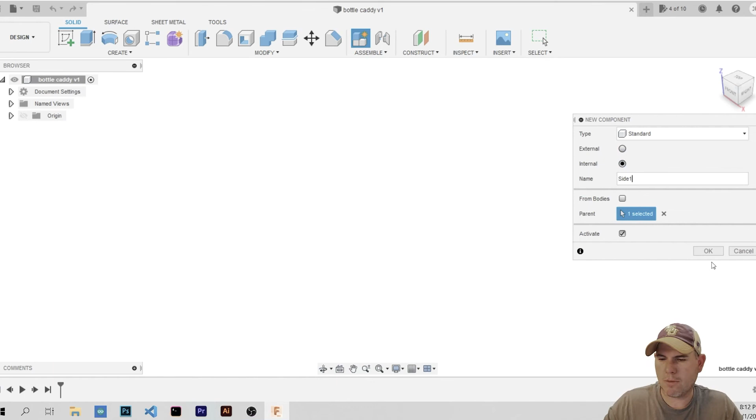So next thing that we want to do now that we have it saved is we want to go ahead and create a component. We want to work from components because it'll help us keep it organized, and it'll actually help us later on if we want to try to move it into a drawing and create a drawing or something like that from it. So we're going to start out working with one of the sides. I'm going to call this component side 1. If you go ahead and name them from the beginning, it'll help keep you a little bit more organized also. I wasn't very good at this when I first started with Fusion, so I'm trying to get better with it.

All right, so this bottle caddy, I want it to kind of resemble an actual beer bottle. So I'm going to bring in some reference material to help us a little bit. To do that, I'm going to come over here to Insert, Canvas, and I have a picture over here of, there it is, a beer bottle. We're going to open that up, and I'm going to select the face. I don't have a face yet, so I'm going to select this plane right here. And for now, I'm just going to go ahead and hit OK. So I don't want to move it or anything just yet. We'll kind of position it in a minute.

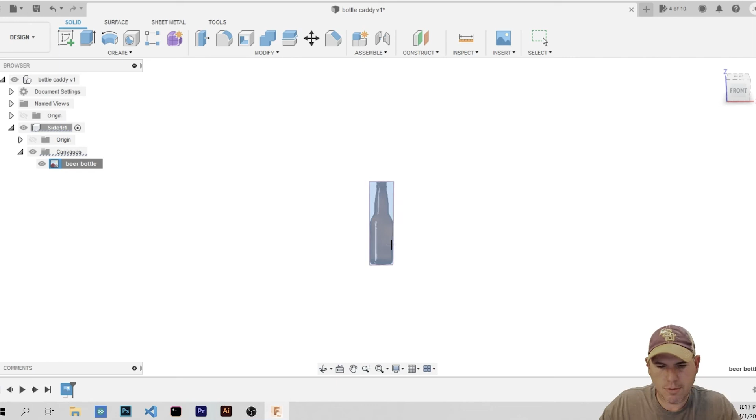The first thing I do want to do is I want to go ahead and calibrate it. So right now I have no idea what size this picture is, but we can change that. So I'm going to come over here to beer bottle, right click, hit calibrate. And then what I can do, I can use my scroll wheel and zoom in just a little bit. I'm going to catch this edge here and then click once over here, and it gives me a dimension box. So, and now I can type in, because I know I want the width of this side to be about 5.5 inches. So I'm going to type in 5.5 and hit enter. You can see it blew up real big, so we'll scroll out now.

So the actual width of this canvas, or this picture that we're using for reference, is right at 5.5 inches now. So now we can really get started.

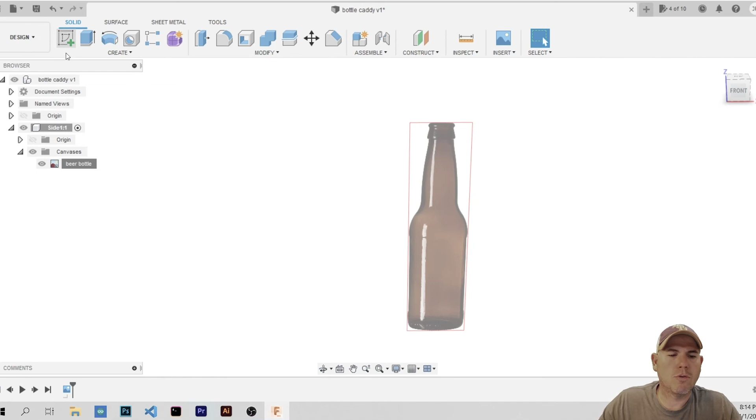To start generating 3D models in Fusion, we first have to start with a sketch. We're going to come up here to Sketch, and to create a sketch in Fusion, you have to create it on either a face or a plane. Since we don't have any faces created yet, I'm going to select one of these planes from the origin, which is going to be the same one I initially inserted my canvas in.

All right, so now that we have a sketch created, we're in our edit mode for our sketch. I want to draw a rectangle, so I can come up here and select a rectangle, or I can hit R on my keyboard, which is a shortcut for rectangle. So click once and just start dragging out.

As long as I don't click again yet, I can go ahead and edit the dimensions of this box. If I click out, I can still edit it, and I'll show you how to do that in a second. But I'm going to show you how to do it like this right now. My width right now, I can type 5.5 because that's how wide I want it to be. Do not hit enter, instead hit tab. That'll move you over to your next dimension, which will be your height. I want that to be 11 inches. So now I have a box that is 5.5 inches wide by 11 inches tall.

But you see how it's blue around here? That means this box is not completely constrained yet. I can actually pick this box and move it up wherever I want to. But I want to be able to fix it to where it will not move right now.

So to do that, I'm going to use some of these constraints. I actually want to use this midpoint. Let me hit escape to go back to my selection tool first, because I still had this edge selected and I don't want that for this. Now that it's deselected, I'm going to click midpoint. I want to select this one down here, and then pick that origin right there. So you see, once I clicked it, the box turned black because the width and height have constrained dimensions, and it's fixed to this point right here now.

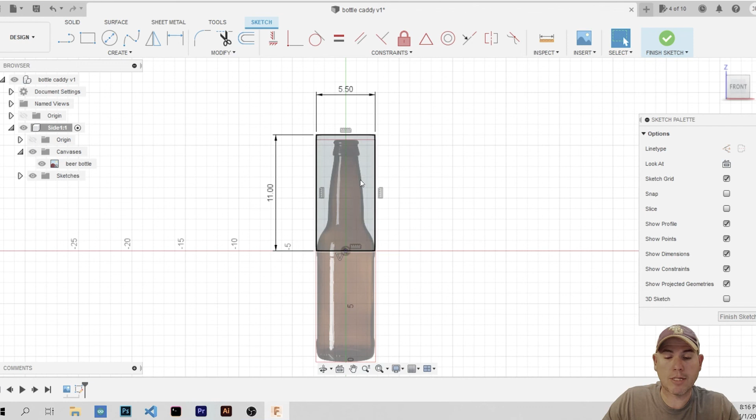Let me back up just a little bit. Now that I have that fixed and constrained, we can move our canvas around to line it up where I want it to be.

So I'm going to select this beer bottle, right click it, and instead of calibrate this time, we're going to edit canvas. Now I can move this thing around. I can move it here, or click on that one and move it left and right. But it looks pretty good left and right.

So I'm just going to move it up a little bit, and scroll in some just to where it's... there we go, right about there is good. I like that. So now I can come over here to this edit canvas panel and just click OK, and that'll get us out of that.

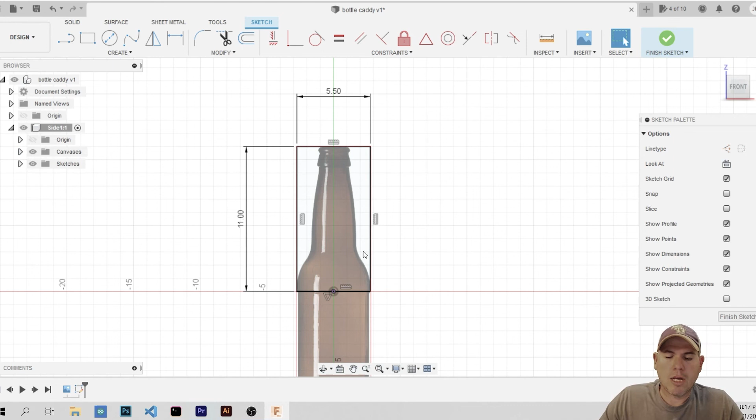So now I know that the height to the divider that I want is going to be 4.5 inches from the bottom. So I want to come over here to this line tool. I could click on the line tool, or just click L on my keyboard. Now I can snap to this edge here, and I can drag this out, and move it up and down.

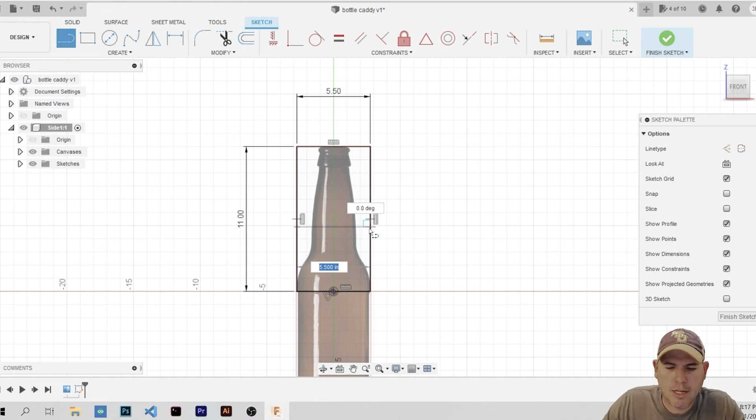If you see the little blue box right there, that tells me it's 90 degrees right there, and I can get it to go ahead and snap to 90 degrees. If I don't snap it to 90 degrees, you see this little icon right here, that's the same as this perpendicular icon here, which is the perpendicular constraint.

So if you didn't quite get it right, we'll hit Control Z to back out of that. I'll show you what you can do if you don't quite get it to 90 degrees. So that's a little exaggerated, but I'm going to come up and pick up that perpendicular constraint. I'm going to click that line, and it makes this line perpendicular to this one. So if it didn't quite snap where you wanted it to, that's how you can constrain that one. So that one's good there.

So now we want to dimension it. To set a dimension, I know I want 4.5 inches from here to here. So we're going to hit D on the keyboard, which is your dimension tool. Now that I'm in the dimension tool, you see the icons changed next to the cursor. I click there, click that line, and drag it out and click, and now I can set this dimension. I want to type in 4.5. So now we're at 4.5 inches there.

The joinery I want on this is going to be a couple rabbet joints, for the divider up top and for the bottom plate at the bottom. So I'm going to go ahead and draw those in, again using a line. I'm just going to draw another line under there for this rabbet here. And then I'm actually going to pick up my rectangle tool for this one, click and get it to snap there, and drag out to this next line here. So now I have where my two rabbets are going to be drawn.

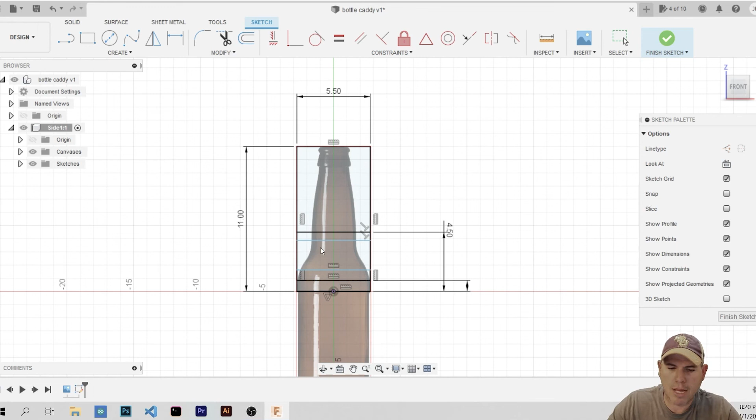So instead of me having to try to do math, because I want this rabbet half the thickness of the material, I can do this right here. I can do 0.482 divided by 2, and I can make Fusion do the math for me. Check that out. So now that's going to be half the thickness.

Now I'm going to dimension this one here. Same thing, but here's another little trick. Instead of having to type that all the way out again, since you've already figured it out once, with this box highlighted and this dimension highlighted still, I can just come and click on that dimension right there that we already figured. And you see how it changed right here. Hit enter, and now this dimension is going to be the same as this one.

We're going to do the same thing up here, and then I'm just going to click down here and hit enter. So that tells me these dimensions here are the same as this one. If I wanted to edit this, I could come in here and put 0.5, and it's going to change all of them to 0.5. But I'm just going to hit Control Z to undo that. So now I like the way those slots for my rabbets are drawn.

Now let's actually tackle this profile I was talking about that we want to do with this bottle. I'm not going to follow it all the way down here. What I'm going to do is kind of draw the neck and the mouth of the bottle, and then just have it widen out till it gets to this point right here. That's kind of the look I'm going for, just to resemble the bottle.

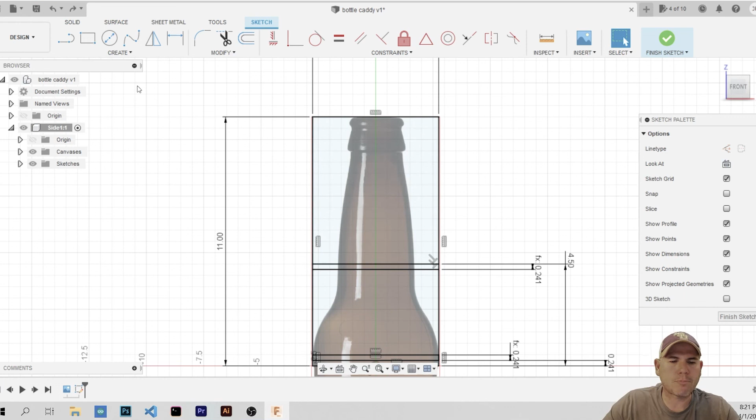To do that, I'm going to jump over here to this tool, which is our spline tool. I'm going to click on the spline tool, and if you're familiar with the pen tool in Adobe Illustrator or Photoshop, or any other CAD design Bezier curve type tool, this is going to be relatively similar. What I want to do is get it to snap to this top, about where this curve starts here.

I'm going to find the middle of the curve and start dropping nodes here about where I want them, about where all these curves are. Since we're going to come down here, I'm not going to come straight down because I have this inside curve up here. I'll click off up here somewhere and get it to snap to this intersection. All right, that's all I want there.

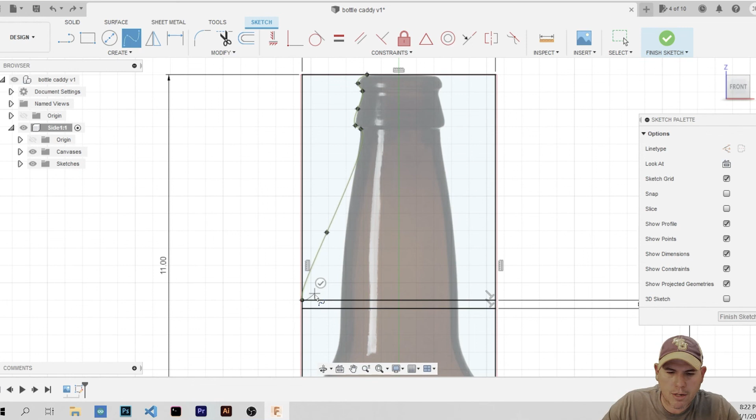Now I can either hit escape on my keyboard and go back to my selection tool, or I can hit this little green check mark here and it'll pull me out of that. I'm still in my spline tool since I clicked the check box, but I'm actually done with it, so I'll go ahead and hit escape.

Now that I've got my selection tool, I can start pulling these handles. You see it's got these little handles here, I can pull those out, drag them, and adjust them. I'm just scrolling in and out. If you lose your handles, just click on the line and it'll bring them back. So I'm adjusting those and tweaking them until I get something I like.

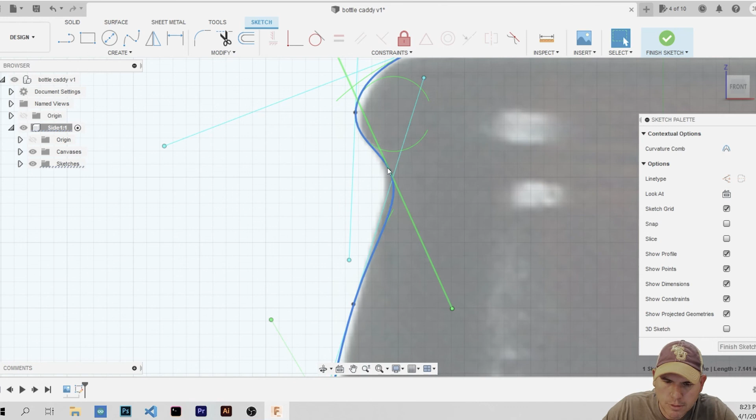Just similarly following the bottle. I'm not trying to get it exact, but I want something that fairly resembles this bottle. I'm trying to get this one here. There you go, buddy, we're starting to look pretty good.

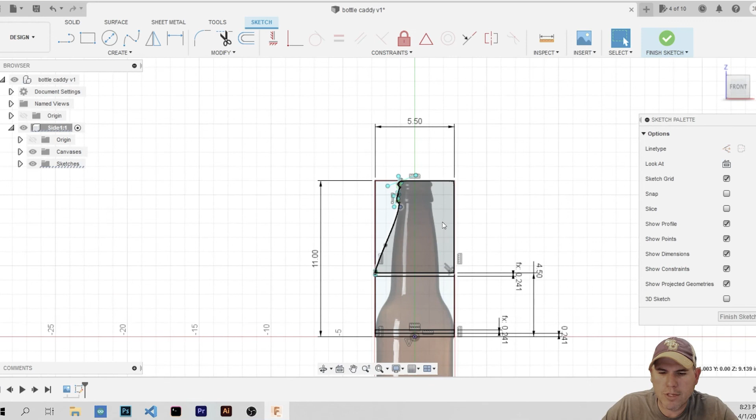See, if I click next to a particular node, that's the node it's going to give me the handles for that I need. Another thing, if I press down on my scroll wheel, it'll give me a hand tool where I can pick it up and drag it to reposition so I can see it. If you don't have a mouse with a scroll wheel, I really recommend you get one.

All right, so I can drag these handles in. This one's being kind of ornery. All right, there we go. Let's see, this one here - oh, that ain't what I want. I can actually click on the nodes also and drag them around some. Whoa, too much - there we go. That's it, let's drag this one in just a little bit.

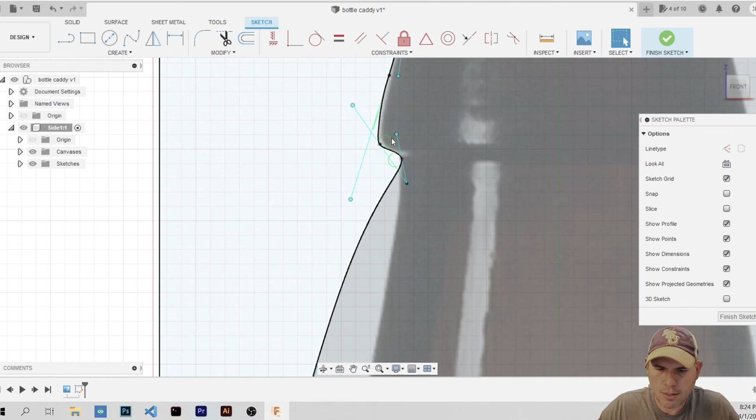Why did you connect to that one? That didn't do what I wanted it to do. We're going to hit Control Z and go back to where it wasn't connected. So guys, I'm going to leave all my little screw ups in here, just so y'all know I do make them myself. I ain't perfect at this, I'm just trying to learn also.

All right, we're not going to get too crazy with it, but that kind of resembles the profile of a bottle, so we're going to leave that there. Now I can click off of that. So now, instead of having to redraw this again, I'm going to just mirror this across. To do that, I could make sure this origin is on and use the Z-axis on this origin.

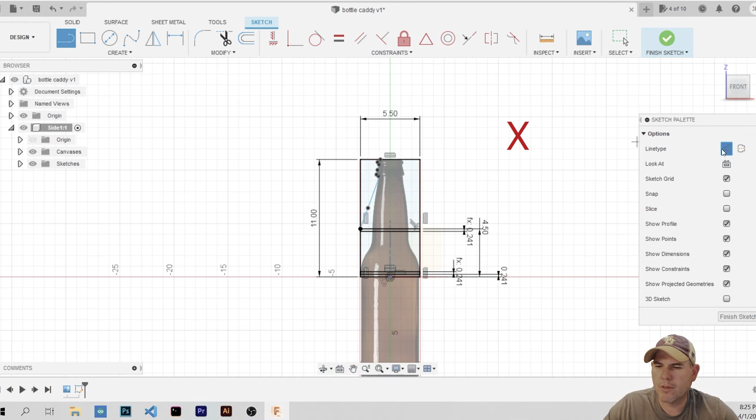But I'm going to go ahead and draw a construction line because I'm going to need it later on. I'll hit L for the line tool, then come over here under my sketch palette to the line type option, this one right here. If I click on that, it'll give me a construction line. I can also toggle that by hitting X on the keyboard, so we'll turn that on. I'm going to get it to snap to the midpoint and draw a little construction line there. I'll hit X to get out of that.

I'm going to go back to my selection tool, click Create, and down here it says Mirror. I'll select that line as my object, and my mirror line is going to be that construction line we just drew. You see, it just mirrored that across.

All right, we're done with that. We can click OK. So now we need to draw our pocket that's going to be for our handle.

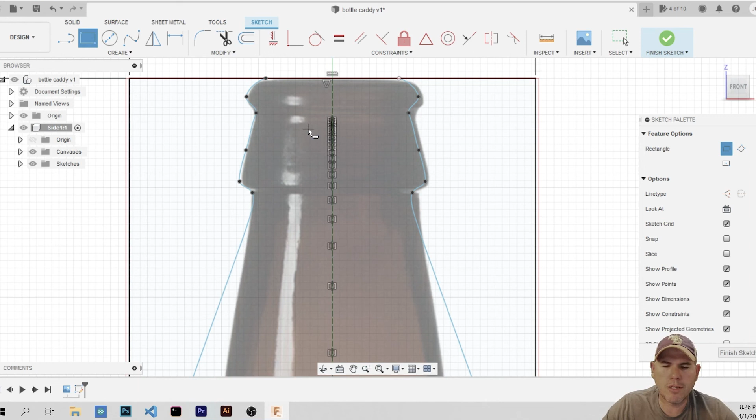Again, we're going to use the same thickness material, so I'm going to draw it out. I know I want it to be 0.241 wide. Tab, I want it to be 0.75, so 3/4 of an inch tall. I'm going to hit Enter.

So again, you see the blue line. The dimensions are good, but it's not constrained. So I want it to be centered on this center line, which is why we drew it. I'm going to click Symmetry, select this side, then this side, and lastly select that center line. As soon as I do, it's going to center it and put those two lines symmetric to that center line. So those have turned black.

I still need to constrain it more. So we're going to go to the Dimension tool, select that line, this line. We're going to drag that out. We're going to call that 0.75.

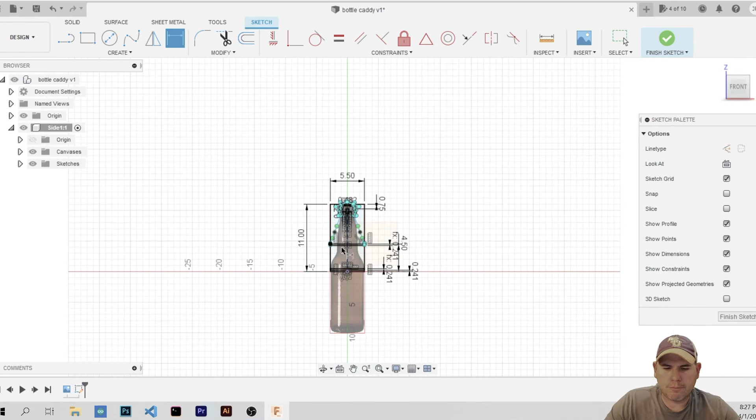All right, so now one last thing on this sketch that I need. I'm going to put a little magnet on the inside of this for either a cap catch or maybe for a little surprise later on down the road. I'm going to go ahead and draw it for the magnet I got right now, which I believe my size is going to be

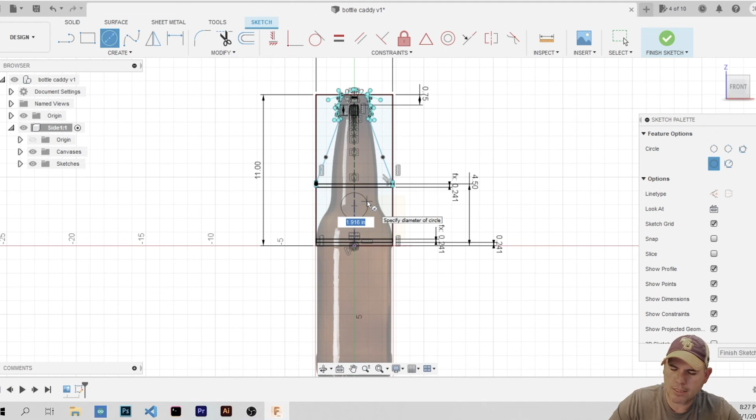0.82. Click Enter and dimension again. Select the center of that point there. I'm going to pull it out here. It's getting kind of messy over there. And I want that about 3 inches, so I'm going to hit 3. Enter. All right, cool. That's pretty much all we need for this particular sketch.

So we can come over here and clean this up a little bit. Let's turn that canvas off. We can click Finish Sketch. And now that we have our 2D sketch, we can go ahead and start extruding this into 3D space.

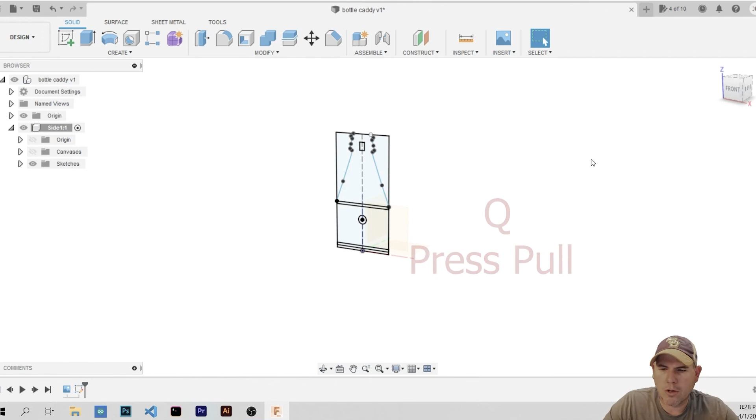So to do this, we're going to use our Extrude or Press Pull tool. I'm going to hit Q on my keyboard for Press Pull. Also, you could hit E, which brings up the Extrude tool, which does work relatively different. I say relatively, they work pretty close to the same, but you are going to have instances when you get more complicated models that they are going to work a little bit different. When we get to some of those situations, I'll show you those. But we're going to be fine here with just the Q tool for Press Pull.

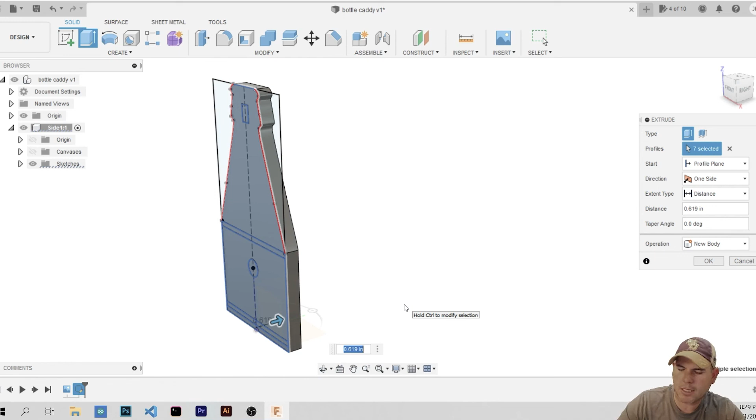And I'm going to go ahead and select everything on this side right now. So now you see we have this little arrow. We can grab that little arrow and start pulling it out. We get another dimension box. And again, my stock is 0.482, so I'm going to extrude it out to that dimension.

All right, so now we have just a solid side here. If I turn this sketch off for just a second, you can see that all it is just a solid profile on the side. So let's turn that sketch back on, and let's go ahead and do the cutouts for our rabbets, our magnet hole, and our handle hole.

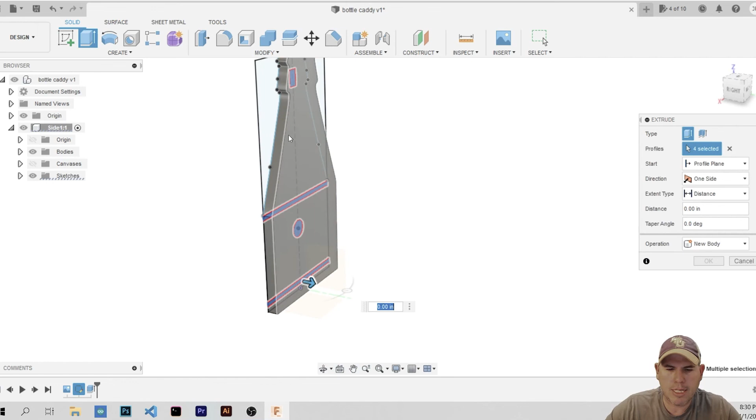So again, I'm going to hit Q for Press Pull again. We're going to click that sketch geometry for the rabbet slot and the magnet, and then for this magnet for our rabbet slot there. So I really want the inside to be this side here, but my sketch is on the opposite side.

So to get it to extrude from there, I can come over here to the extrude panel, and from the start right here, instead of profile plane, which is the plane that the sketch is on, I can come down here and do from object, which is where it's going to start. So it's telling me to select. I'm going to select this other face right here. So now I'm starting from that face.

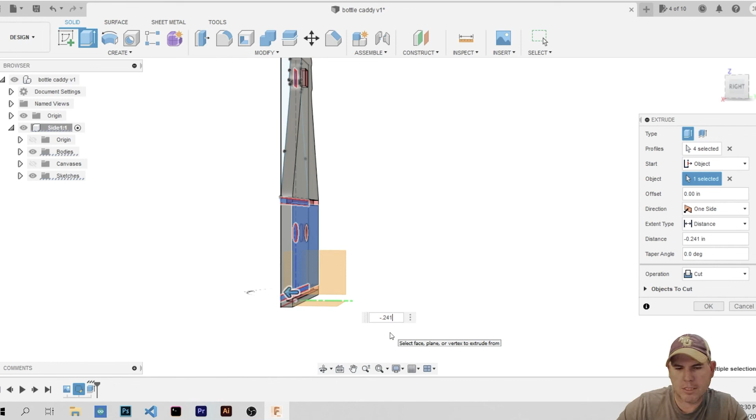So instead of pulling out this way, I'm going to come in this way. And as you see the red, that means I'm starting to cut. So now, again, I'm going to do minus 0.241, which is half the distance, actually half the thickness of my stock.

So now if we turn the sketch off, you see we have some nice little slots for rabbets for our divider and for our bottom. We have a hole here for our handle and a little hole here for our magnet.

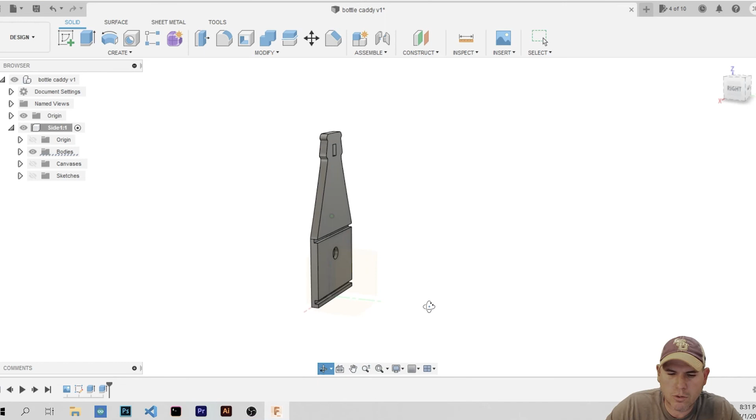Now that we have one side drawn, just like the sketch geometry, we don't need to recreate this particular side again. We can just mirror this across, just like we did the sketch. But to do that, we need something to mirror it around, so we're going to use a construction plane.

I'm going to click that and make a construction plane that's halfway in between this inside face of this side and the side we're going to create. I'll click on that to tell it that's where I want it to start from, and pull this out 4.5 inches because I know I want the divider and the bottom to be 9 inches in between the two sides.

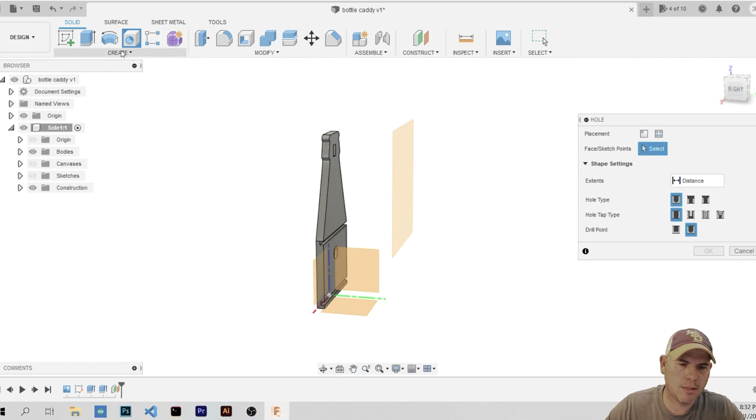So now that we've got that, I'm going to click create, not the hole tool, create. And again, same thing, mirror down here. So in our mirror panel, instead of mirroring faces, we want to actually mirror the entire component, because this will create us a whole separate component for the other side.

I'm going to click component, select this side here — this is a component — and the mirror plane is going to be this plane. Now we can just click OK.

So now we actually have two separate sides. If you see, it showed up down here. I can click it once, and click and hold, and it'll let me change the name. So I'm going to call this one side 2.

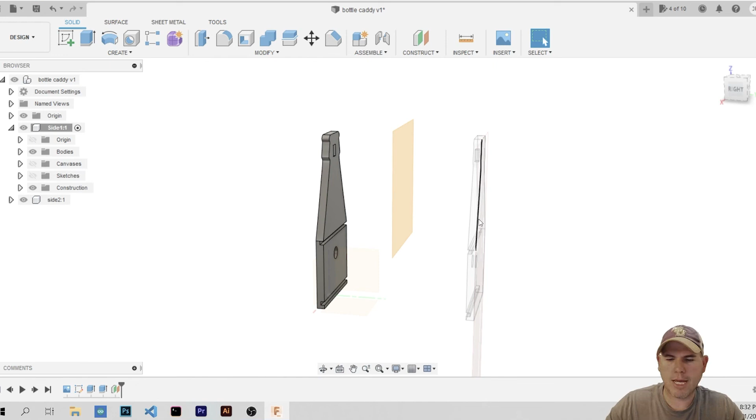Now that we have two separate components, you see how it's kind of a wireframe here? That's because our active component is still the first one we started with. If we come down here and click on side 2, you see how this little radio button jumps up here. We can click on that, toggle it on, and now it'll give us the other one.

So if you see, that component copied everything, and even our canvas is turned on for this other component. So let's clean it up — let's turn that off, and let's turn this construction plane off for right now because we don't need it.

Let's go back to side 1. We still have a construction plane on somewhere — oh, there it is. Sorry guys, I'm a little blind right now, but like I said, this is the stuff I screw up with when I'm doing this too. So there, that quick, we have two sides.

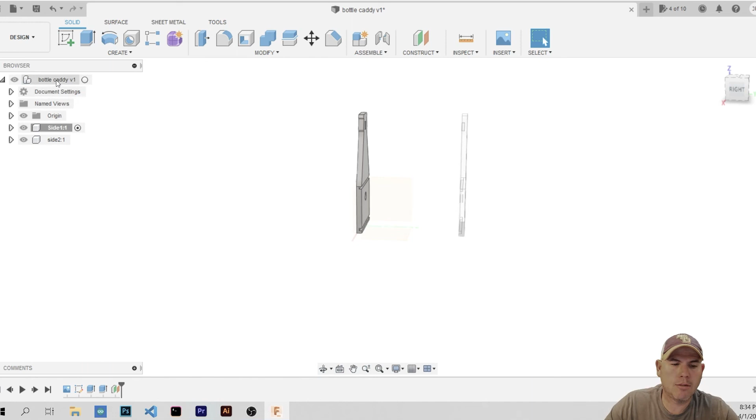So now let's go ahead and jump into our geometry and our sketch to start doing our divider here and our bottom. For that, I want to create a new component to do that sketch in. Actually, let me back up — that sketch I actually want to create in my main project.

I'll show you why here in a little bit. So I'm going to go back and select my main project and have that as my active component. I'm going to create a new sketch, and I want this sketch to actually start on this face right here — it's going to be the top of that divider. So I'm going to click on that.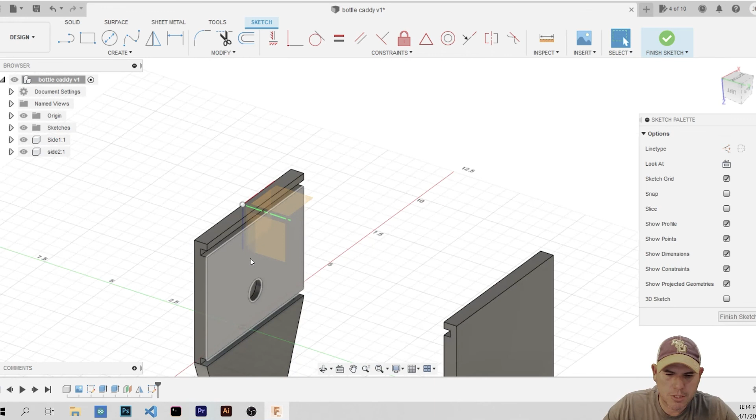Then what I want to do — let's scroll out, kind of get this to turn — I want to pick up some of this geometry from the other sides to make my life a little bit easier. So instead of just trying to draw it, I can actually project sketch geometry from existing models. To do that, I'm going to hit P for project.

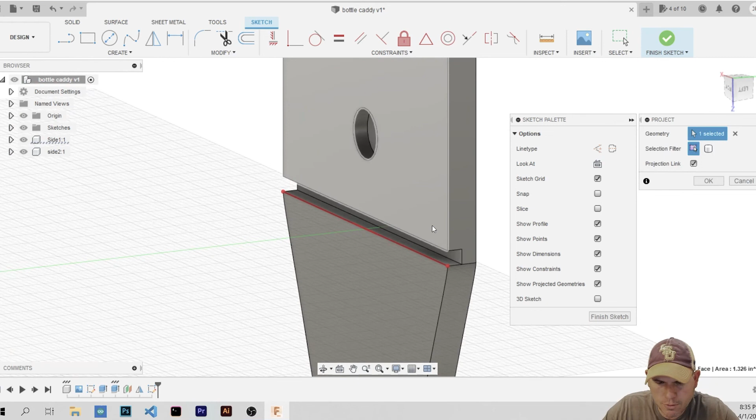I'm going to come down here and select this face right here. Let's scroll out, and then I want to select this face right here. Now that I have both of those faces selected, I hit OK. I'm going to turn both of these sides off now — you see, I have some geometry over here that allows me to snap to it.

So I know that's where my rabbets are going to be. I can go ahead and pick up my rectangle tool, catch this corner here, and then catch that far corner there. Boom, we got us a rectangle.

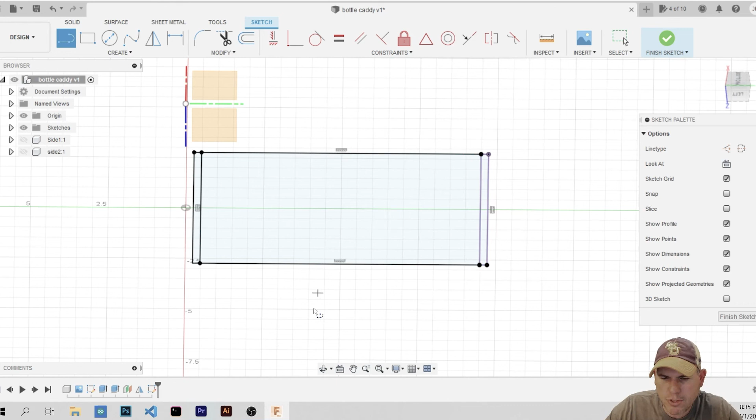Now, for where that rabbet's going to be, I'm going to grab my line tool and draw a line here. Even though that projected geometry is there, I still like to draw my own line. So if we measure this, I'll escape and grab the tape measure tool. Double check, boom, right there, that's 9 inches.

So what we want is a couple little holes in here, and when I say a couple, it's going to be 6, because this is going to be a 6-pack carrier.

I'm going to get straight on this thing where I can see it. You see your little box up here, it'll tell you which direction you're looking at. So we're actually looking at the bottom. I want to click on the middle of that and give me a direct bird's eye view of that bottom, even though I've already drawn one circle.

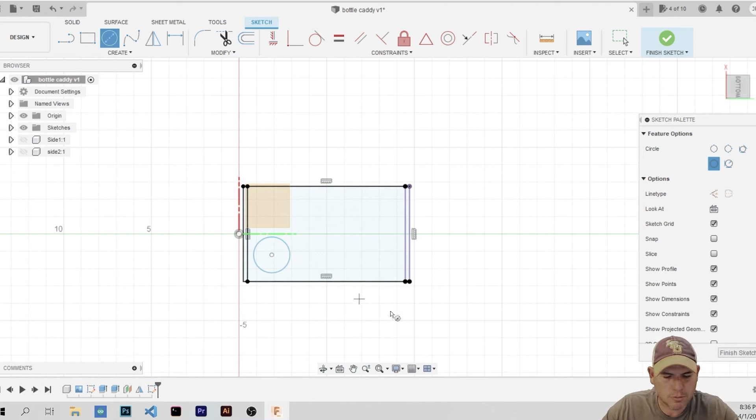So we got it drawn. I'm going to hit D for dimension, drag a dimension out. I want this to be 2.5 inches. All right, cool. So now I also know I want this to be 1 inch and 3/8.

1.375 from that side, and I want it to be, oh there we go, .75 from where that rabbet starts, the inside edge of the side there. So now we have one drawn.

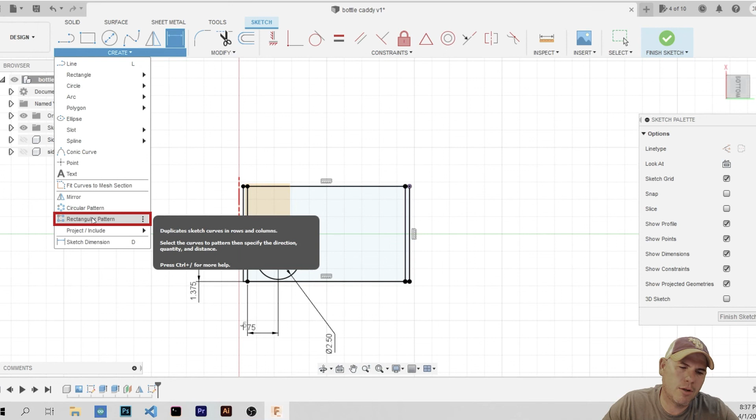Again, we don't need to draw each one individually and try to dimension it and position it. I'm getting ahead of myself. We can hit create again. Down here you have rectangular pattern. Click rectangular pattern, and over here select which object you want to make a pattern of. We're going to make the circle.

The directions, so we want this direction there to start with. Your extent, what that's going to do is whatever dimension you put in here, that's going to be your dimension from center point to center point of this third circle, since it's set for 3 right now. We actually want spacing for this one.

So I'm going to click spacing. My quantity as 3 is good, but it still looks like 1 because I haven't put a dimension here. So I actually want, what is it, 2.5, no, 2.75. What in the world did I just type? There we go.

Dadgummit, let's undo, I screwed that all up. Did y'all see what I did? I think I put 22.75. So let's start that over.

So click it, that direction there. I want to select this line because I want this direction first. 3's good, we're still on spacing. I want 2.75. There we go, that looks a lot better.

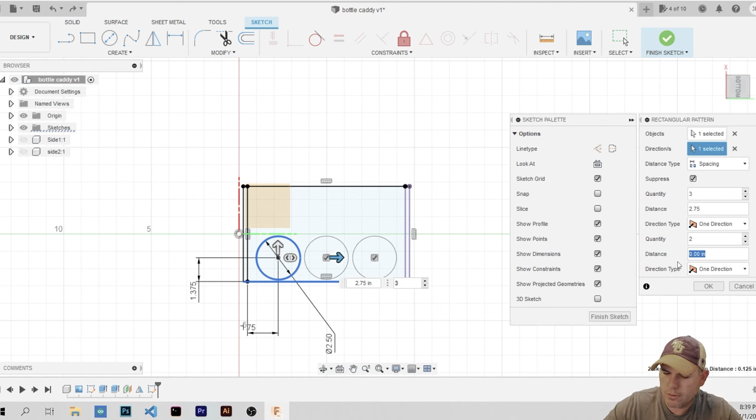So this other axis, I want 2, and I also want 2.75. Cool, so there we go. Now we have where our holes are going to be.

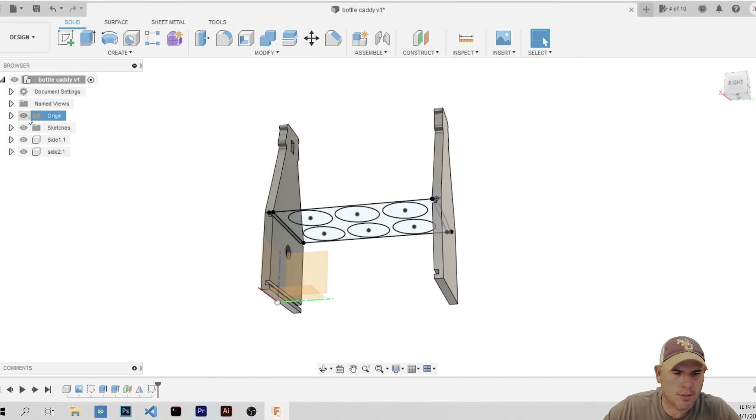That actually looks good for this sketch, so I'm going to click finish. I'm going to go ahead and turn these sides back on so I can make sure I see which direction I'm pulling this and kind of move this around. I'm going to turn this origin here off because this kind of irritates me.

So now again, we can hit Q for our press pull tool and select the geometry that we want. For right now, I want everything but the holes. Now that it's selected, I can start dragging it out, and I can either drag it out and figure the thickness of this, or I can just catch that corner and drag it out to there.

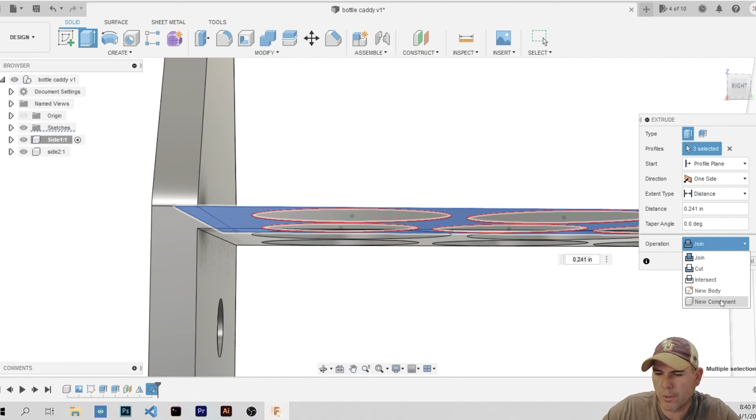Now if you see, it's trying to go ahead and join this to the sides because Fusion down here on this operation is going to try to assume what you want to do. But I don't want to join, I actually want to create an entire new component. So I'm going to click New Component and click OK.

Good deal. So now that that component is created, I want to come down and make that my active component because I've got a little bit more I want to do with this. I want to make this the thickness of the actual stock. Right now it's just the thickness of this rabbet that's going to go on the side. Okay, so I'm going to get this where I can see it.

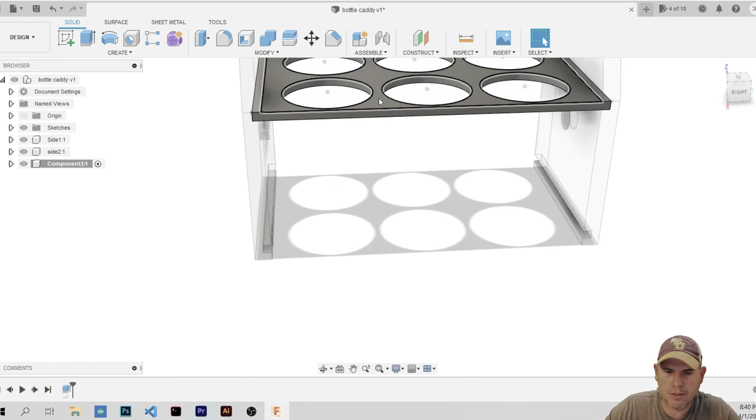Hit Q again, select just this face. I still need this sketch up here. Select the sketch geometry, and just like we did before, when I hit Q for press pull, I'm going to come down to object because I want it to extrude from this bottom. Pull it on out, we'll do that same 0.482 divided by 2.

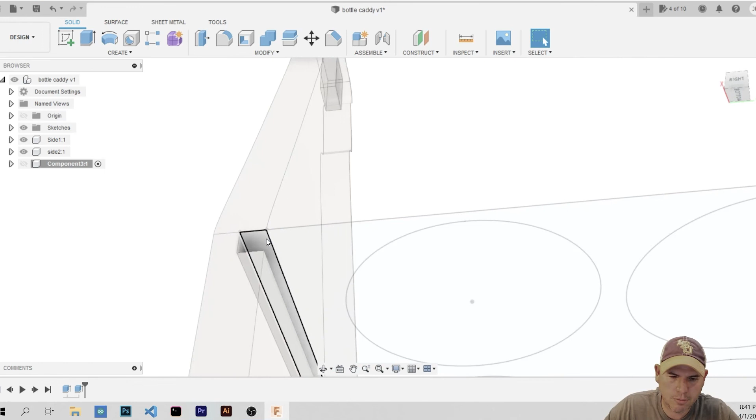Alright, so now we have our divider drawn with our rabbet in place for our joinery. We need to create a bottom, and I'm going to do it very similar to what I did for the divider, but I'm actually going to turn this component off.

I'm going to get up here where I can see, hit my press pull, select the same geometry I did for the divider, and then use from object, and select this face this time to extrude from, and we're going to start extruding. Did you see what it said? It said the component's not visible because it's trying to create a new body because I'm inside this component and I have the visibility toggled off.

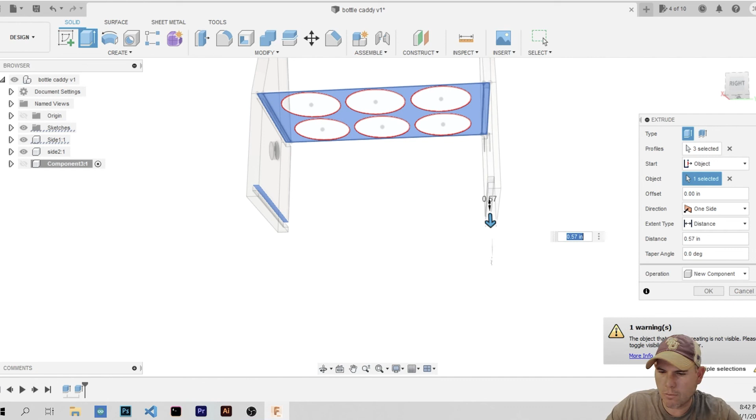So it's trying to assume I want to create a new body, but I actually want a new component. So I'm going to go ahead and click new component. Why are you still doing this to me? Alright, let's trick it. Let's turn this component back on.

And we're going to do 0.241. There we go. And you know what, that's where I screwed up. Let's undo this. Undo, see what I did? Actually hold on, I want to show you what I did. I'm going to redo.

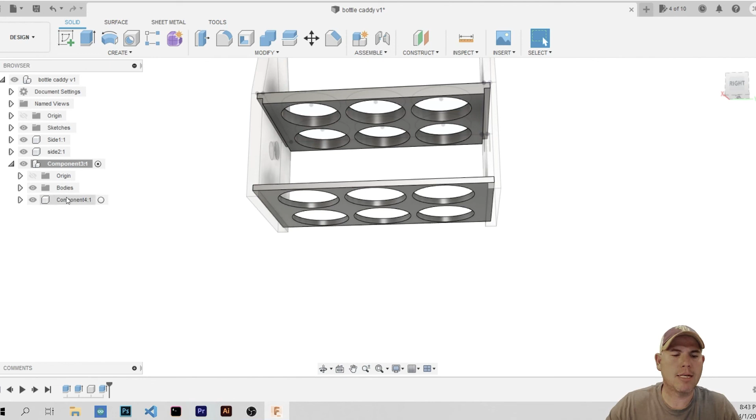And if I open this up, instead of me - since component 3, which is actually my divider, which I need to change the name of, was the active component - when I tried to make a new component, it actually just nested another component inside this component. But that's not what I want. I actually want to go ahead and make the entire project my active component.

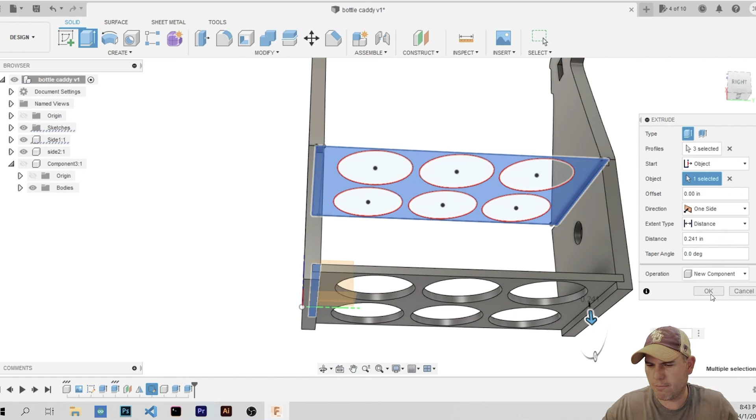Let's try that again. So let's Q, select all this geometry. Cool, now same thing, object, because that's where we're extruding it from. I'm going to select that face. We're going to start dragging it out, 0.241. Again, it's trying to join, but we want new component. Select OK. Alright, good deal.

So now we have the component we want. And before I forget this time, let's go ahead and rename it. Let's stay organized - bottom, let's rename this one. Remember, click it and then click and hold, and it'll allow you to edit it. And this is going to be divider.

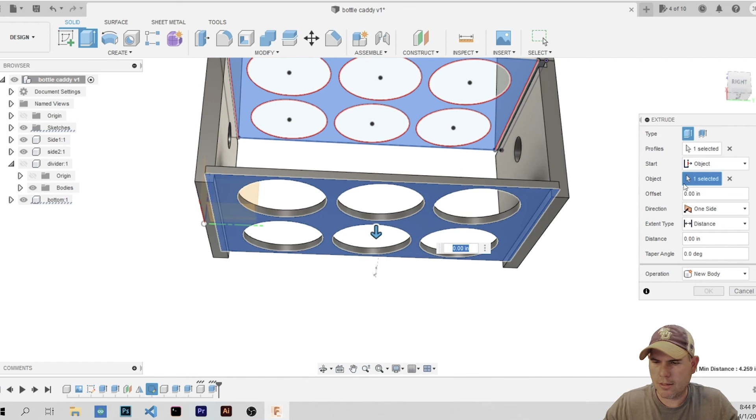Cool, alright, so now we need to draw the rest of it again. So just like we did before, let's go ahead and hit Q for press pull. Select just the middle part, and then object. Select that, and we're going to pull it out.

And this is one thing that would kind of mess you up. Since we're extruding from an object, if I tried to click on this corner to get it to snap, instead of snapping, it's going to think you're trying to change where you want it to extrude from. So you lose that functionality a little bit - just a quirk that drove me crazy till I figured it out.

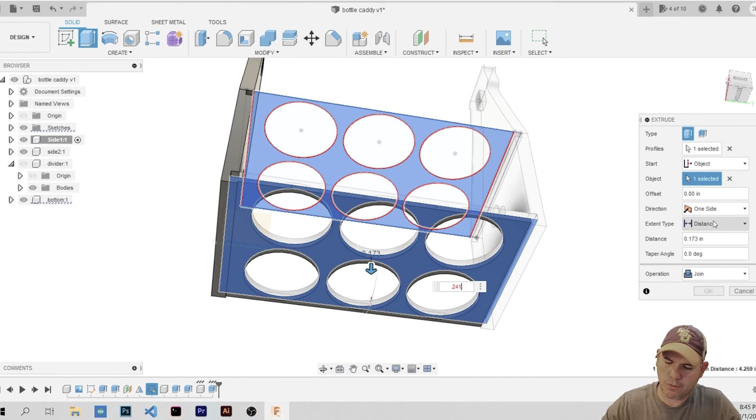So let's try that again. Q. I'm going to go object from there. So I'll pull it out, so I know 0.241. And you see what I did? I screwed it up again.

Let's try it again. Q. From object - and this happens to me all the time. From object, I got in a hurry, and instead of join, which - hold on, and this is another reason, I'm about to screw up again. Let's hit cancel.

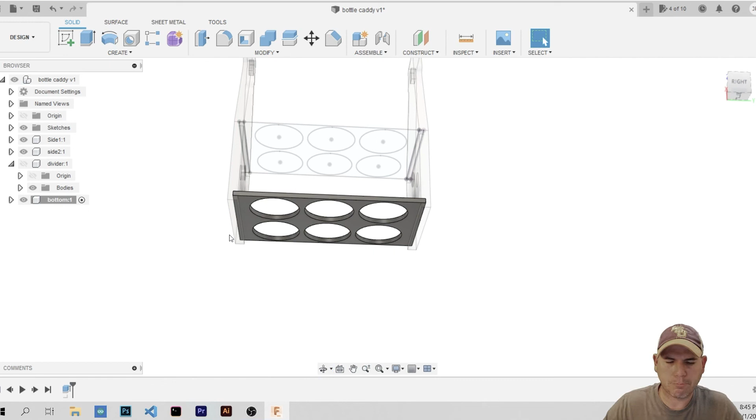Another reason it's messing me up is I need to go ahead, since we've created it, swap into this component and make the bottom component my active component. So now, one more time - and I'm not cutting any of this out, guys, I'm going to show you my little screw-ups, because even the little bit I've learned about this program, I still screw it up too. So let's drag that out. Now this join is going to join just to this bottom.

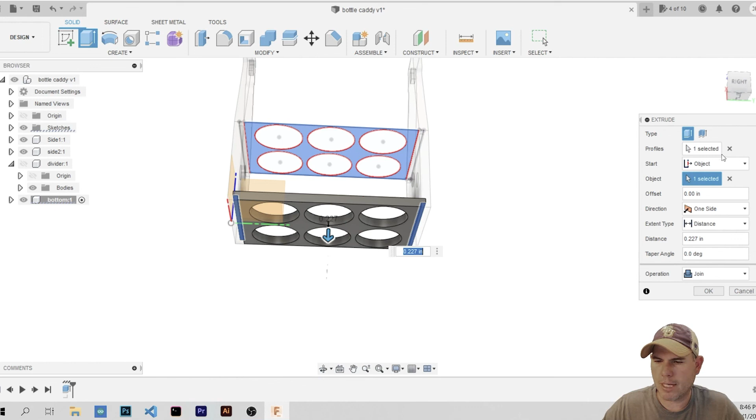But we need a bottom, not holes, so I need more than just this geometry anyway. Let's come back up here and select more profiles. So we're going to select that, and that. Our distance down here, 0.241. Join. Good. There we go.

So now we have a divider with two sides. Let's make this one active just so we can take a look at it real quick. There we go. So we have a divider, a bottom that's got some little recesses there, two sides. We're getting there, guys. So now we really just need a handle and a couple little side pieces here, and we're going to be about done with this one.

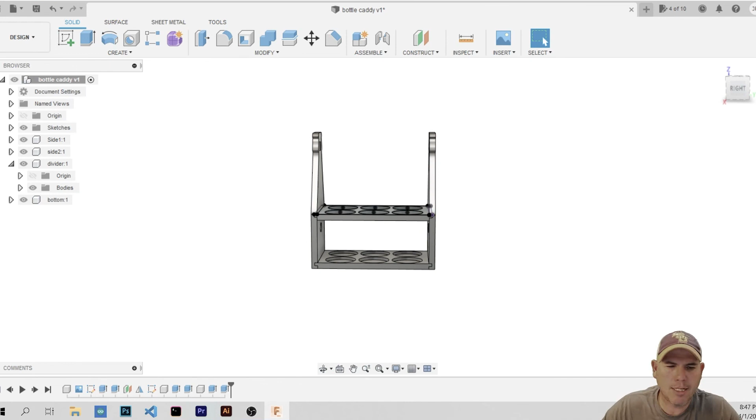So again, I want to come up here and create a new component. And I forgot to name that one, which is fine. We can change it now. Handle.

Okay, we're going to create another sketch. We've done this a time or two now. But I want this sketch to come from here. We're again going to project.

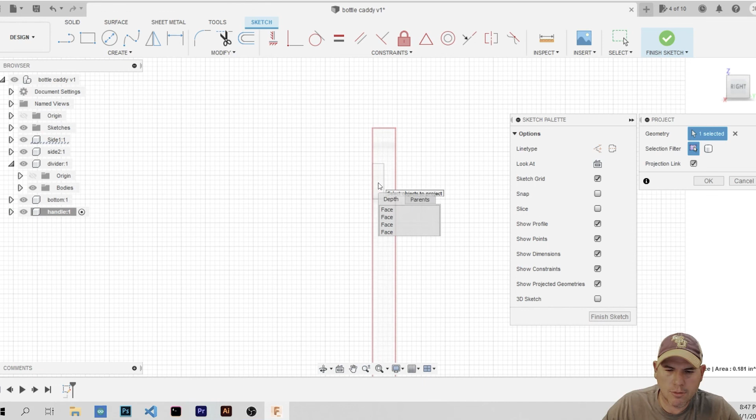And so I can actually select through stuff, but see, it's trying to select this whole side. If I click and hold, it'll bring up this little panel right here, and I can kind of scroll down through them and get it to highlight on the face or the object that I want it to select. So I've got this one. I click that. Now I'm click and hold again because I want to project that one also.

Cool. There we go. So now we have some projected geometry in there. I can go ahead and turn these sides off. So, oh, there it is. Side. Let's even turn the bottom off. We'll turn all of them off for now.

So we'll even turn this sketch off up here. We're just going to clean this up. So I still have my projected geometry here. So I'm going to get us some construction lines going here. So again, y'all remember how to do that?

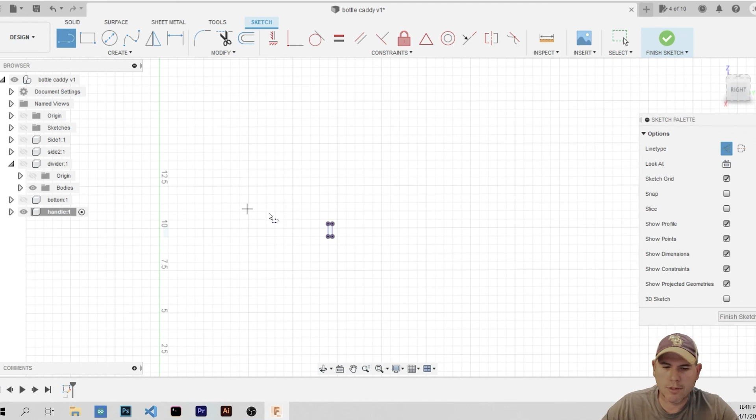What is it? Yep, that's it. L. And then X for construction line. So I'm going to go from, catch this projected geometry there. I'm going to catch this corner here. And I'm going to draw one more random one up here.

Which we'll fix in a minute. Now see how it drew kind of crooked? I'm going to show you how to fix that in a second. So, and then I'm going to catch this midpoint here, and draw just a straight vertical one. I'm going to click that, get out of it. Go back to my selection tool by hitting escape.

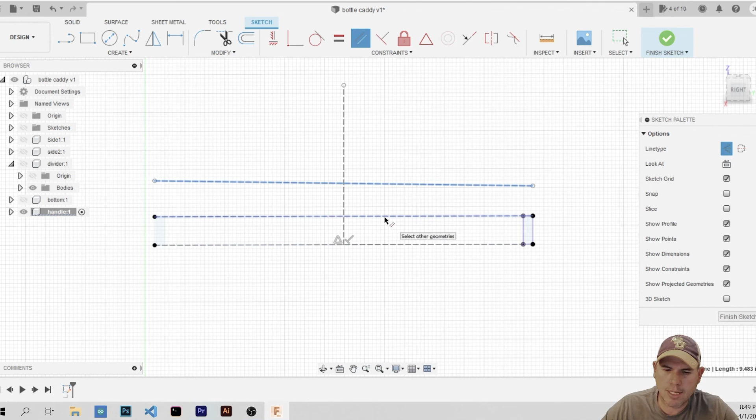Now this one, I can constrain that to where it is parallel with this. So this parallel, I've got it highlighted. There we go, fix my little screw up from when I drew it. I'm going to hit D for dimension again. And again, I want this one also 0.75 from that one, since we already know this one is, because this is off the original geometry.

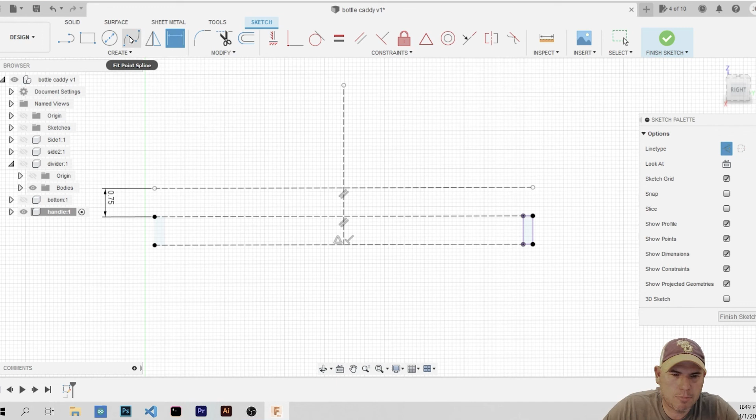All right, cool. So we're going to go back to this spline tool again. We're going to draw some more curves. So, oh, I don't want construction now, so let's get rid of that. There we go. Just something about like that. I'm going to hit the check marks.

And now, again, I can go back to my selection tool, and I can kind of adjust these. Give me just a nice little slope here. You know, something just to... something a little different than just a dowel rod or just a straight handle. So we're going to keep it basic though. All right, so we got our little curve.

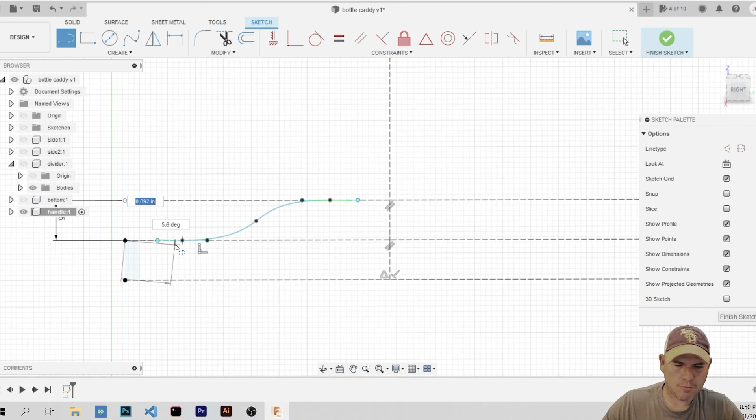Now let's go back to our line tool. We're going to click L. And we're going to draw out some actual lines and connect up with these. So there we go, there we go. I'm going to catch this middle here. So another little constraint, it's kind of hard to really throw dimensions on some of these Bezier curves.

If you just don't like the blue and you don't want it to move anymore, you can come up to this fix, and you can click that, and instead of it turning black, it's going to turn green. Well, it's just showing you that you just fixed it where it's at using that fix command. So just another little tip. All right, so now, just like we did before, I'm going to come up here to create.

I'm going to click mirror. Not there, there we go. I'm going to select all my lines. Oh, not that one, see how it's trying to select that line also?

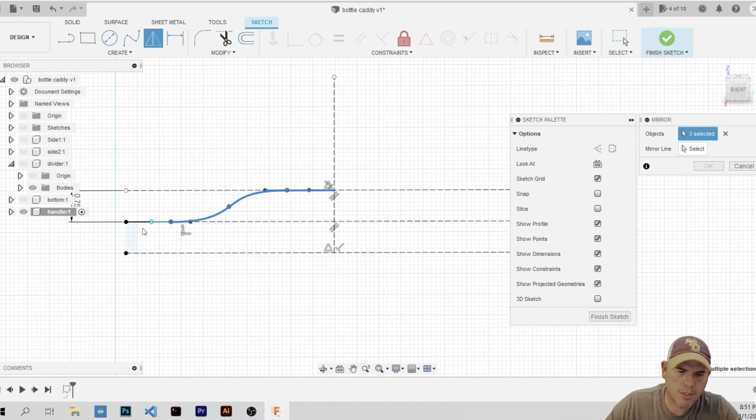Just like we did before with selecting the face, I can click and hold and it'll give me this panel. If you've got a couple lines in the same general vicinity and it's trying to select the one you don't want, you can do that to select the right line. So we've selected those to mirror. Hit that to select our mirror line, and we're going to select this line. Boom, there we go. Now we've got a curve there.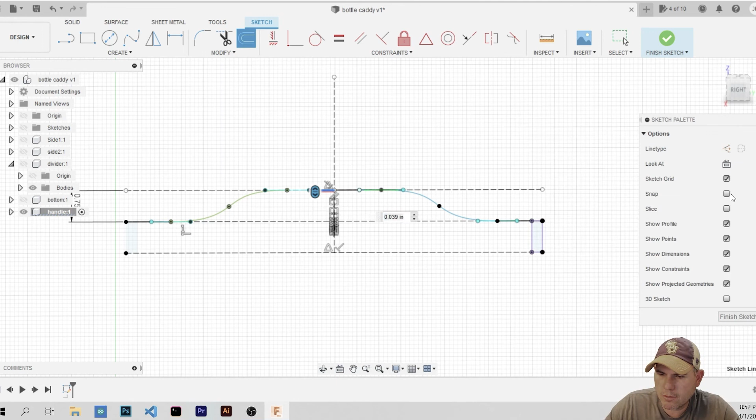We've got a curve there. Now instead of redrawing it again down here, we're going to come up to the offset tool, and I'm going to select all this geometry again. Something is not connected right, so let's hit cancel and see if we can figure it out. I see what it is, let's go back.

So undo a couple times. My line snapped to my handle and not to this node right here, so let's try to redraw that and make sure it snaps to the node that we want. There we go, this one should be good. Now let's try that again.

So mirror, we're going to select that, and click and hold because it's trying to select the wrong one again. All right, mirror line, boom, there we go. Now let's try the offset, see if it'll select. There we go, now it'll select the whole thing.

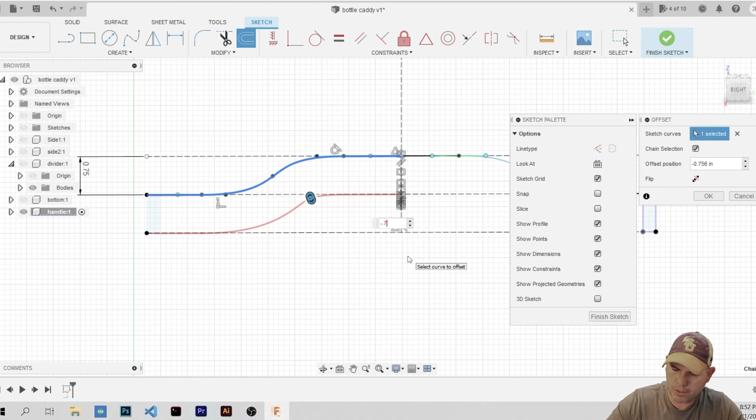So I want to come down here, which means I'm going to have to drag it negative. I want minus 0.75. There we go. All right, so it won't let me do both of these at the same time, and I should have shown you that it wouldn't. The reason is because these are actually still two separate sketches on either side of the line. So if I try to select both of them, it won't let me, because for this one I'm going to have to drag it in a positive direction, and this one was a negative direction that I had to drag it.

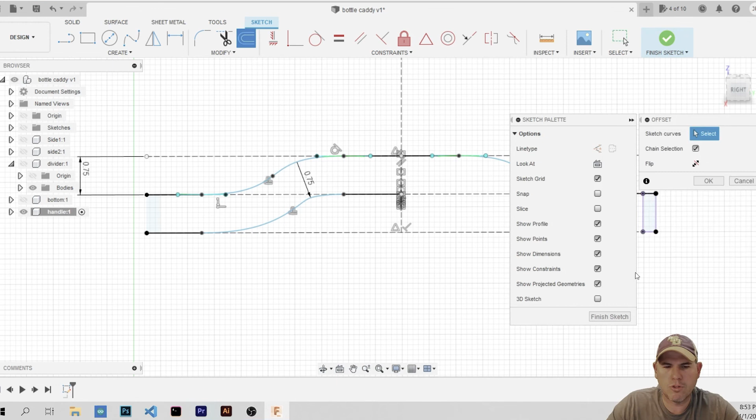So I'm going to show you. I've got that line selected, so if you can see my dimension right here, when I start dragging it... well, it made a liar out of me. Minus 0.75. Every other time I've done those it's been opposite and it wouldn't let me select both. So, it made a liar out of me.

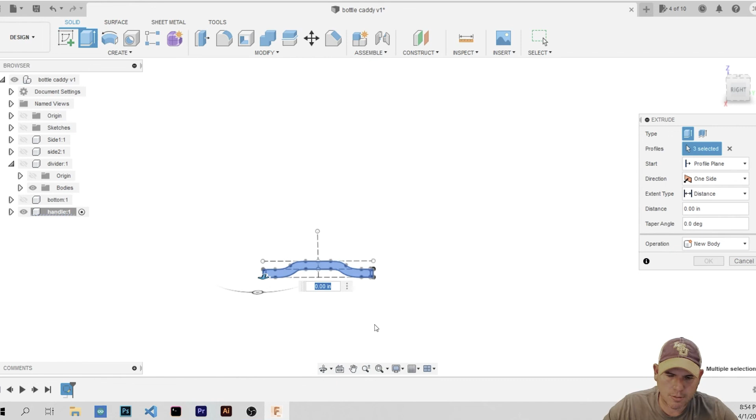But I digress, so let's finish this off by closing these ends up right here, so we have some closed sketch geometry that we can actually extrude. All right, we can finish sketch. I'm going to hit Q for the press pull, select all of these, and I'm going to turn my sides back on.

Give me something to snap to, and let's back that up where I can see it. There we go, let's get it to select that point. Good deal, 0.482, I like it. We're already in our handle component, there we go, there's our handle. So let's turn this sketch off so we can kind of see what we're doing.

All right, looking good. So the last thing that we need is just a couple little panels right here, just to kind of clean it up and hide our little rabbet joints there, just add a little bit of class.

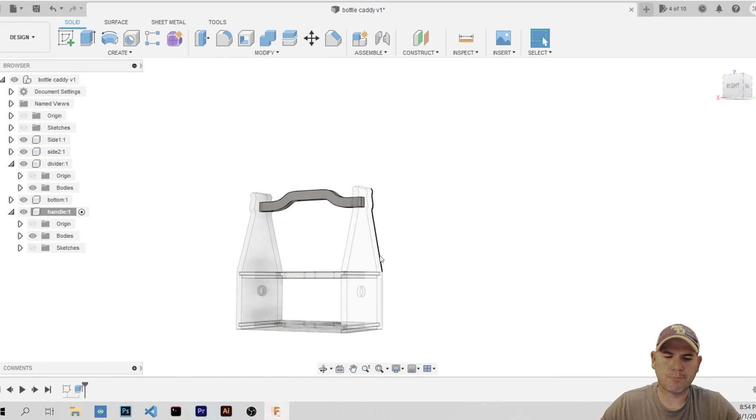So to do that, I'm just going to do the same thing, create another component, and this is going to be, we'll just call it the trim. Works for me. I'm not very good at naming conventions, so you'll just have to bear with me. And I got ahead of myself.

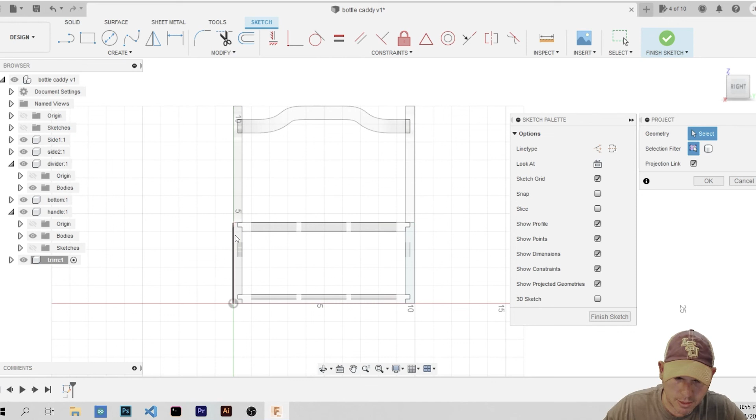I'm trying to go ahead and, nope, I do need to. I'm going to create a sketch, select this face right here. All right, we're going to project some geometry again, so I'm going to project this line, and this line. Hit OK, we'll go to our rectangle tool, which was what to get that? Yep, that's it, R. Click and drag out.

Do D for dimension, I want this 1.25. Good deal, there we go. So that's all we need for that.

Finish sketch, Q. We're going to select that and see, because of the projected geometry, it's still kind of giving me some funky sketch geometry, but that's fine. Just make sure you've got everything you need selected. Kind of rotate where we can see it. I'm going to pull it out, and I know I'm going to make this 0.25.

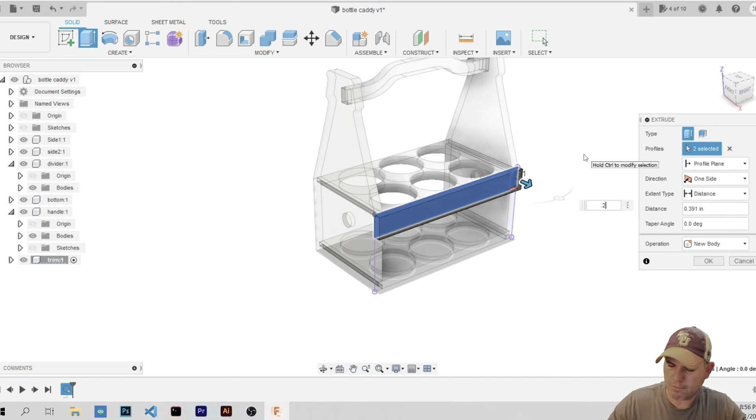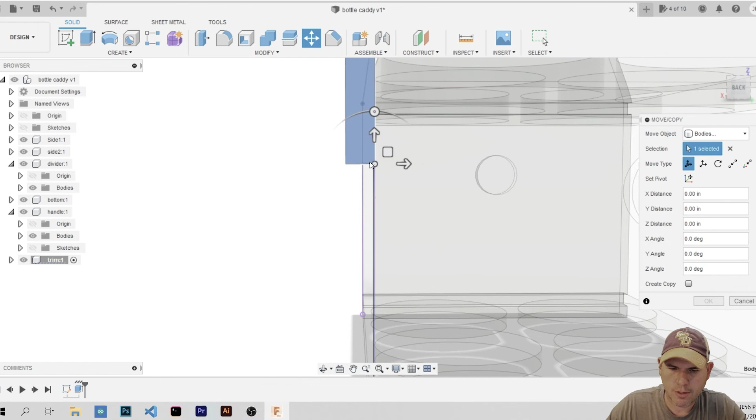All right, so now all we need to do from here is basically make a couple of copies of it. To do that, I'm going to use this Move Copy tool. I'm going to select on that and get this thing to snap to this corner right here as the origin. One little pro tip that will eat your lunch: before you start moving anything, if you want to create a copy, you need to come down here and click Create Copy, because once you start moving it, it won't give you the option to click Create Copy. If you don't believe me, just ask me how I know.

So now that we got that selected, I can start dragging down, and just like we did before selecting faces, I want it to snap to that corner. I don't know why I said click, but that's good. All right, so we got that side done.

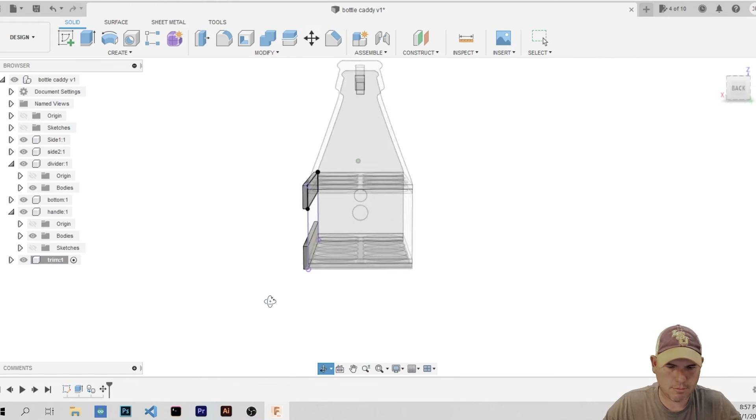Now all we got to do is take both of those and copy them to the other side. I want to use this point as my origin this time, so I'm going to click on that corner. Then I'll use my cursor and select this other rail here. Now we got both selected. Create Copy. Start dragging out, and I can click on that corner there, and click OK. So that's it, we are drawn.

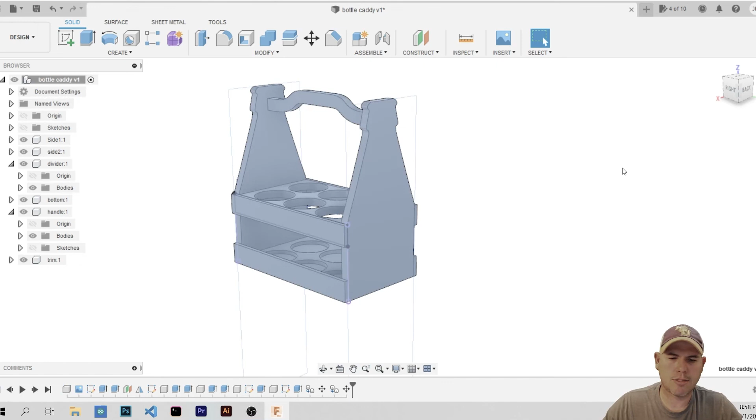So we'll come back here, make this our active component, click off of it. Let's turn off the visibility on any of these sketches just to clean it up a little bit, close that stuff up. All right, and there we go. Let's rotate it around a little bit. And there's our bottle caddy drawn.

We could actually clean it up, come in here and add some fillets right now, but I'm going to just leave it as is, and we'll get into that later on in another tutorial.

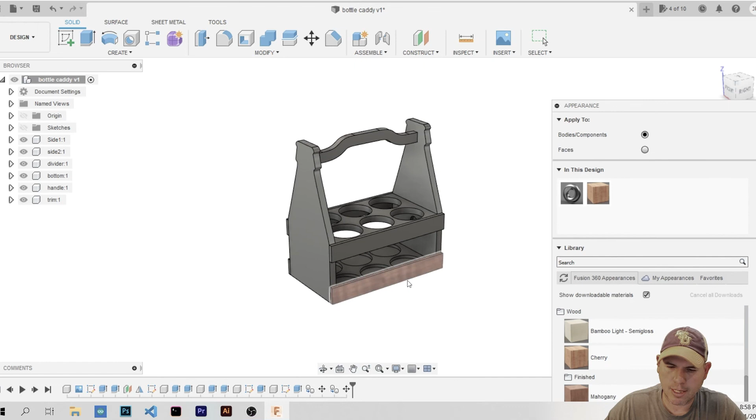But just real quick, I know this thing's getting long. I'm going to hit A on my keyboard to bring up my appearance panel. Let's just make this look good real quick. I can come through here and it's got me some options. I'm going to click on wood, and let's give this thing some cherry. So I'll grab that, click and drag, and let loose on whatever component or body you're wanting to give a little appearance to.

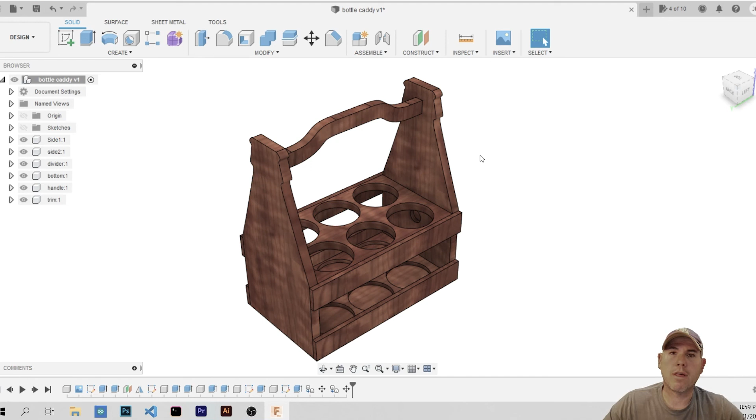There we go, just make it look good. Hold that out. And there we go... nope, didn't do it... there we go. Now we go. All right, now escape, get out of that. And there we go, there's a nice little 3D render, which is another reason that I like using Fusion 360, because I can make a nice little render and have a nice little product to show a customer of whatever project I'm designing for them, so they can see basically what their project's going to look like before I ever start actually building it.